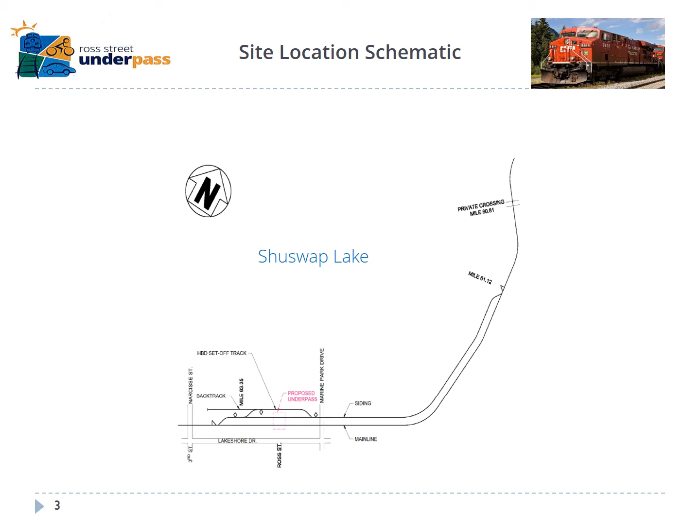You'll hear me use a bit of the railroading jargon tonight, like hotbox detector, for example. We've been forced to kind of learn some of that jargon over the past couple of years, and that's why I have Mr. Lavecchio here to maybe explain what some of that stuff means.

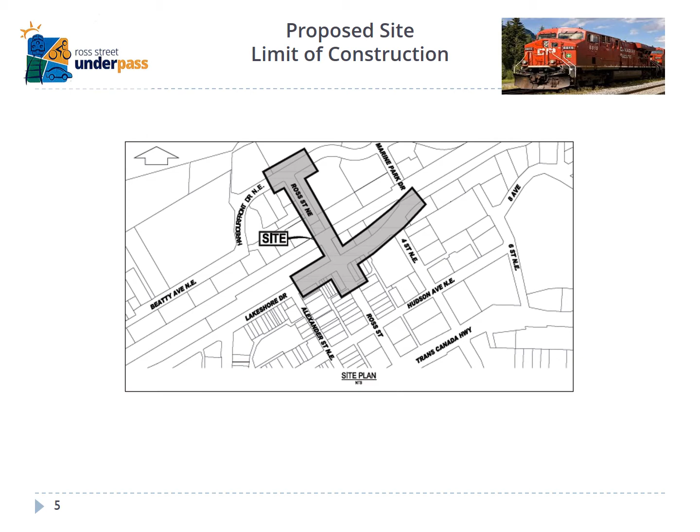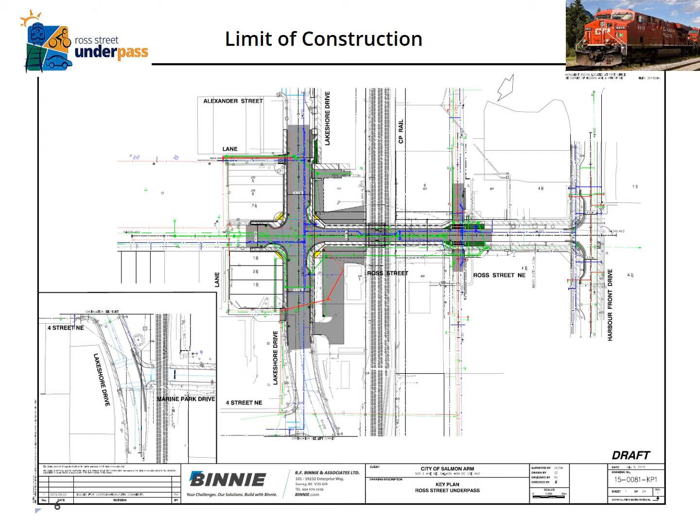Some of the changes that are going to occur with the underpass project - for example, Ross Street, north of the underpass, is going to have no parking on either side.

And also on the right-hand side of the screen, you'll see that there will be no parking on the north side of Harbourfront Drive. And why is that? It's because people that are going to be traveling to the waterfront, pulling boats and trailers, need room to pass. And with the parking that exists today, that simply is not possible.

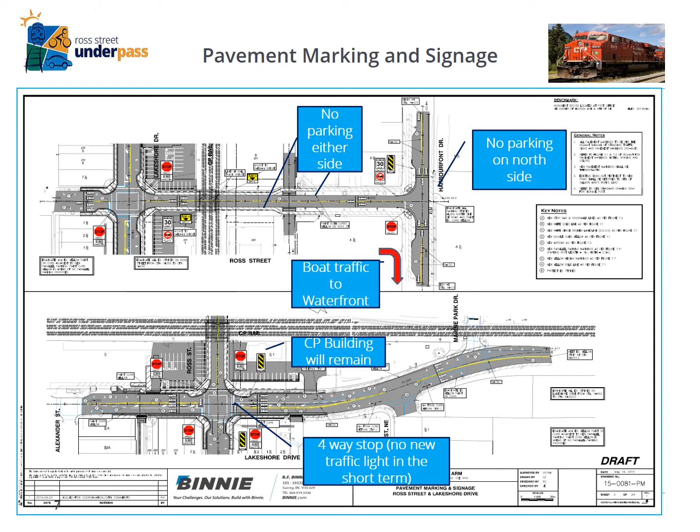What we also show on the bottom half is that the existing CP building is going to remain, and that will remain for the foreseeable future unless we come to some other agreement with CP Rail in the future. To do otherwise with that building would add a couple million dollars to the project, and it's simply not something we're looking at right now because CP...

At the bottom of the screen, you'll see that at the intersection of Lakeshore and Ross Street, it's going to be a four-way stop, and there's not going to be a traffic light at this time, although that may occur in the future. The railroad was constructed a long, long time ago in 1885,

and the concept for the Ross Street Underpass was developed in the early 1980s. So it's not a new idea. There are successive councils that have talked about it and endorsed it in the downtown revitalization plans of the city for many, many years.

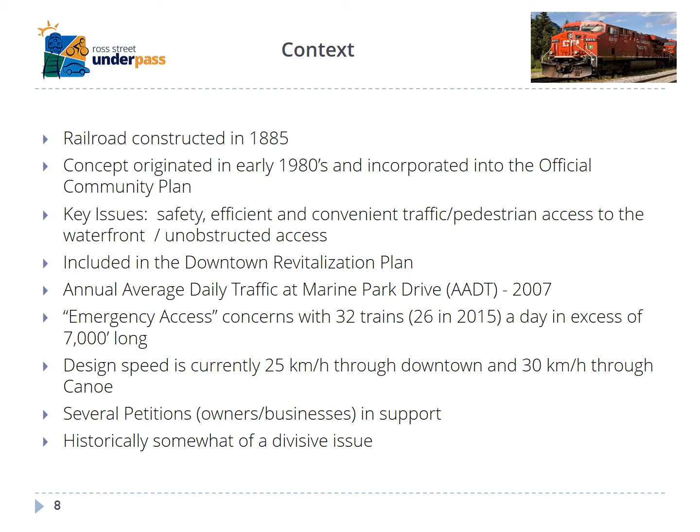Of course, there have been several petitions over the years to City Council, both in favor and opposed to the project. And we've looked at many of them over the years.

For example, 5th Street Southwest, 6th Street Northeast, Shuswap Street, and I'll speak to those just briefly. We've looked at many of them over the years, some perhaps with not as much rigor as we've done with the Ross Street Underpass, because the more that you study these other alternatives, the more you'll see that they're simply not feasible from an engineering, land acquisition, or financing perspective, and that the Ross Street Underpass really is the only and the best option.

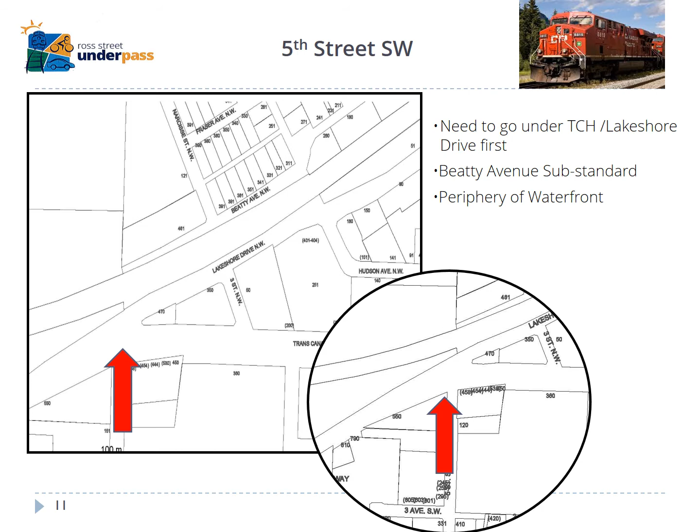For example, this is 5th Street, where we've looked at going over the right-hand side. Some challenges with that location are that you would need to go over or under the Trans-Canada Highway and Lakeshore Drive in order to get to the waterfront. It's really not feasible from an engineering perspective.

And even if you were able to use Beatty Avenue, which is a bit substandard at that location, you would end up trying to enter the waterfront from the western periphery, as opposed to going into the heart of the waterfront at Ross Street. We looked at this, and the time and cost was estimated at 1.7 million, but it's really not feasible from an engineering perspective.

This is an example of what that alternative would entail in terms of developments and major property acquisition that would be needed to go straight down across the tracks from there. And it's simply not feasible at this point in time.

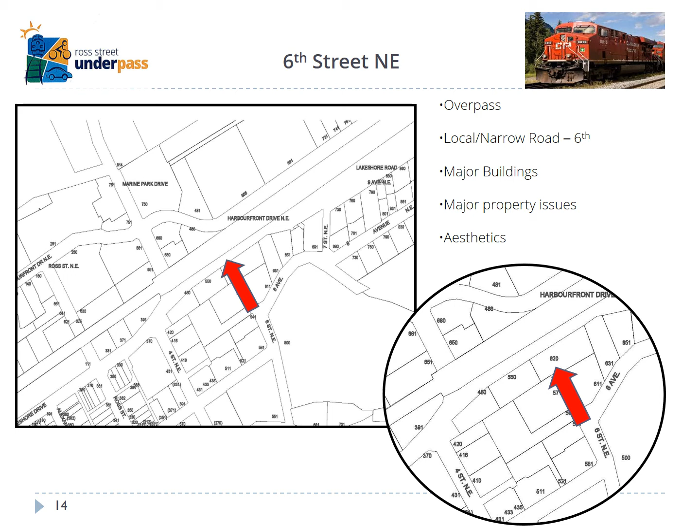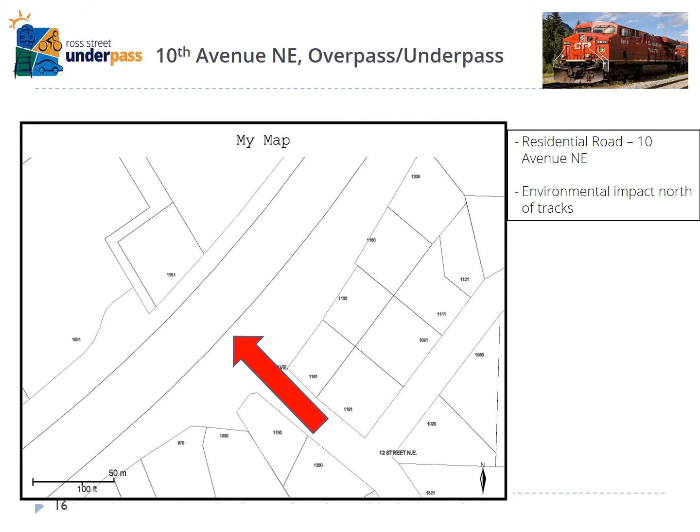There's also the option down from the health unit, and that does have some possibilities, but really 10th Avenue is a residential road at that location, and there would be major environmental impacts on the north side of the tracks. For example, that's where the Raven Trail is, and there are some environmentally sensitive areas.

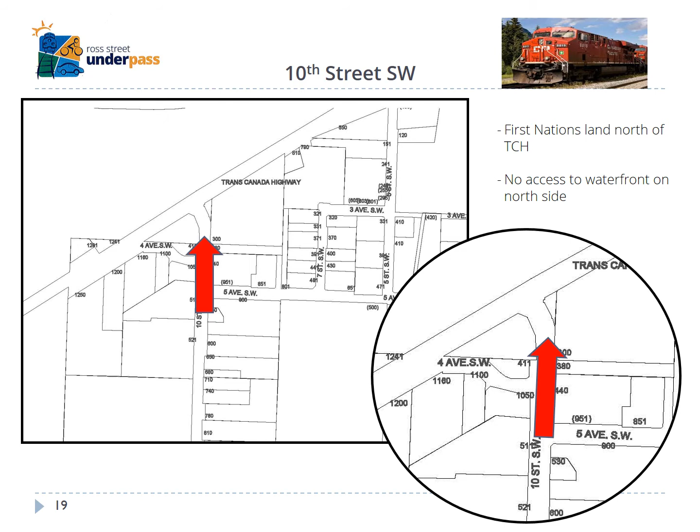We've looked at 10th Street Southwest, but there are many challenges with that location. You can see it goes through Adams Lake Indian Band properties, and there's no access to the waterfront even if you were able to get to the north side of the tracks.

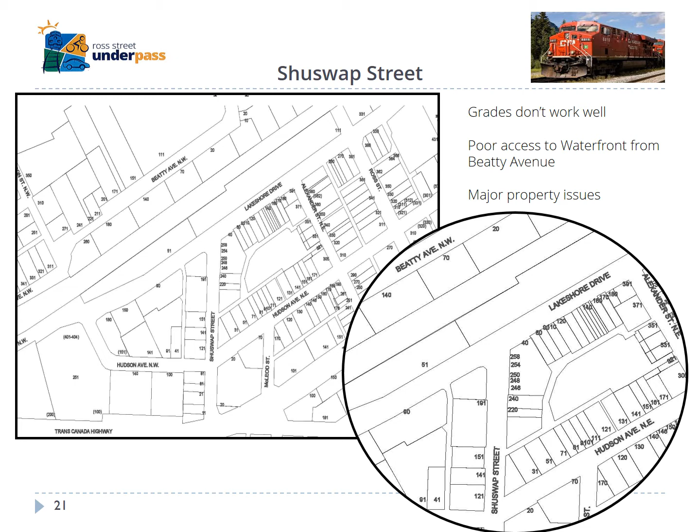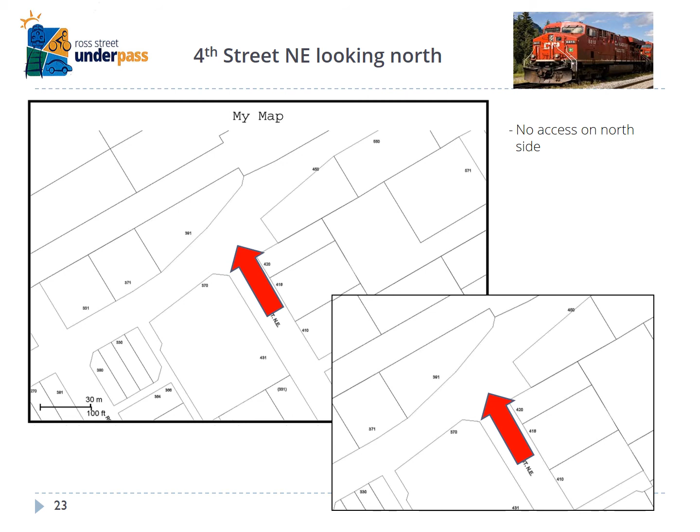We've looked at Shuswap Street, which also has some potential, but the grades don't really work there. There's poor access to the waterfront and issues that would need to be overcome. We've also looked at 4th Street Northeast — again, many challenges, as there's no real access to the waterfront if you were able to get over at that location.

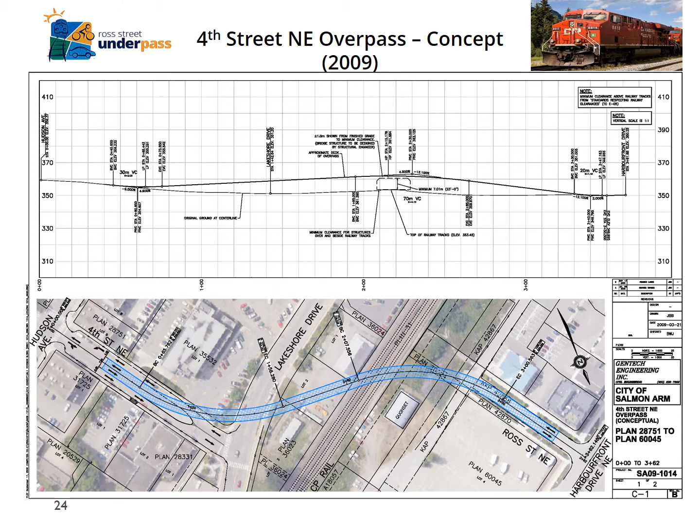We did do some design work on the 4th Street overpass concept many years ago, but really didn't pursue it with much more rigor at that point because it's really simply not feasible.

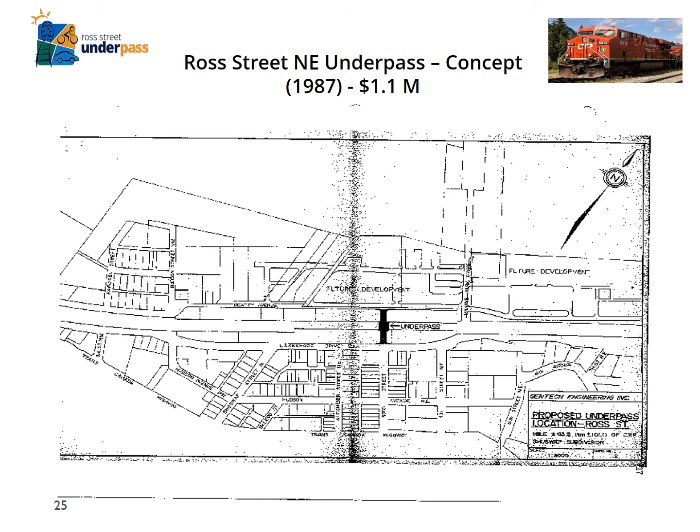So the point of this is that we have looked at many alternatives and without fail come to the conclusion that Ross Street is the only option.

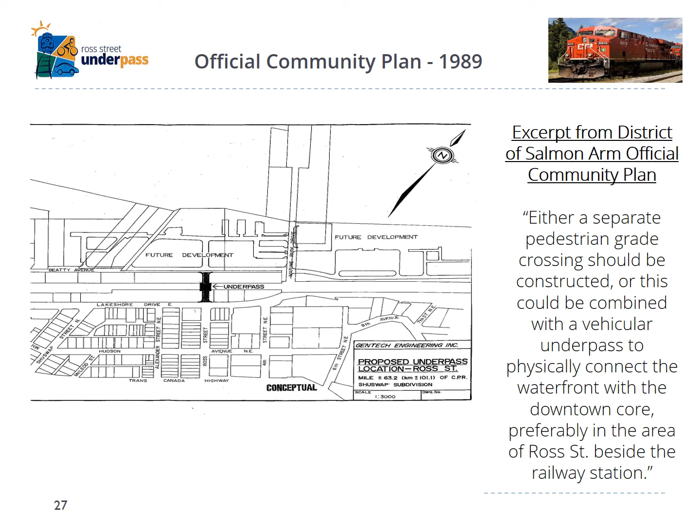This is a design concept that was done in 1987 for the Ross Street Underpass location. This was done by Gentech Engineering, and you can see it was $1.1 million, the estimate back then. So we should have done it then.

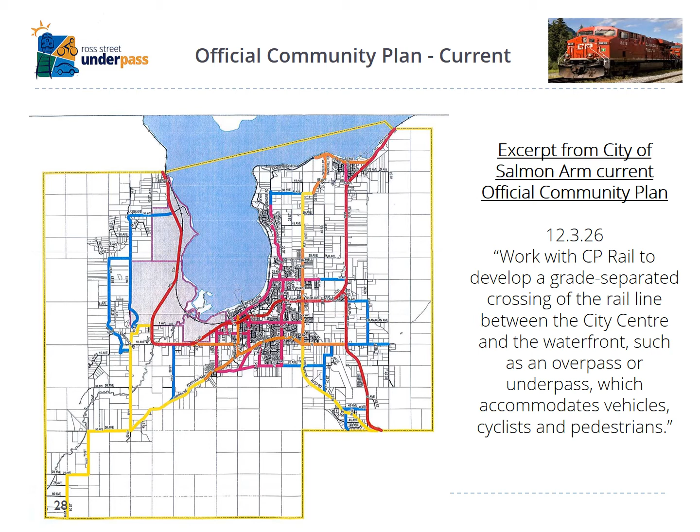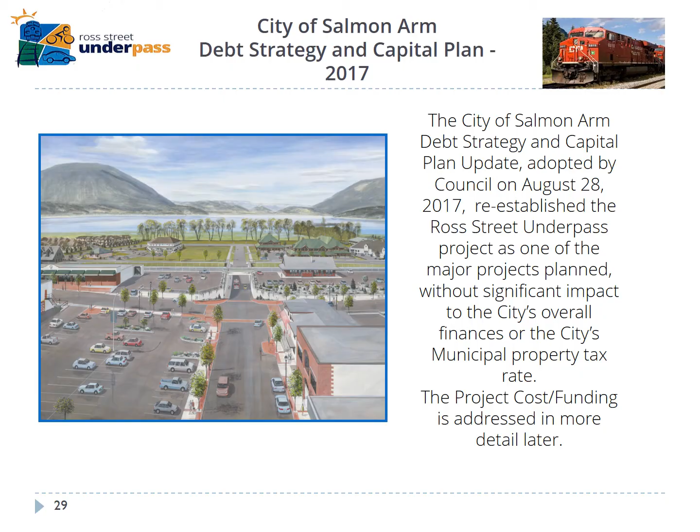Ross Street Underpass has been in our official community plan, as I mentioned earlier, since the 1980s. It's in our present official community plan, if you're one of those people that like to study. It's also in the city's corporate strategic plan, done a couple of years ago and endorsed by council. And as you'll see later, it's included in the city's long-term financial plan and debt strategy. I'll speak a bit more later.

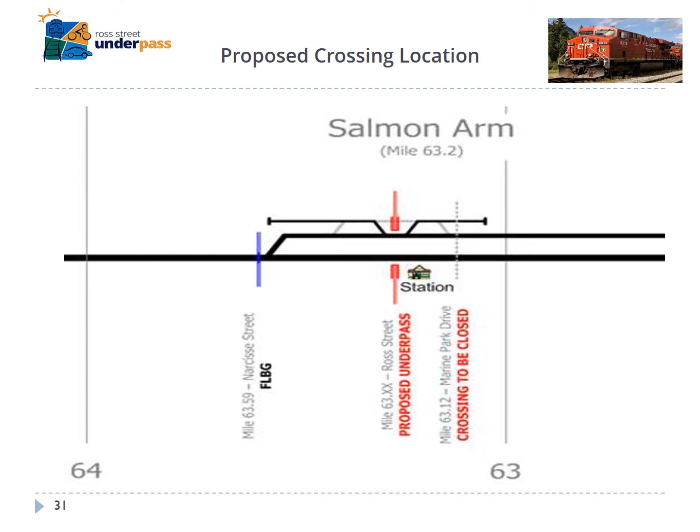This is showing the CP infrastructure that exists there today with the station, and talking about some details if the project goes in for the project in Tappen.

There's going to be what's called a 2-track shoofly diversion, shown by the red lines that may be hard to see on the right-hand side. What it means is the tracks are going to be diverted around the construction area to allow the underpass to be built. Shoofly is another one of those funny CP terms that Mike may speak to later.

Hot box detector - that's a location that exists today where there's a set-off track for trains that are in trouble for mechanical reasons or other issues, so that CP can drive up with their vehicles and do whatever repairs need to be done. So there's a hot box set-off track and detector there today, which is kind of close to Gibbons Motor Toys on the south side, and it would be moved east of Marine Park Drive.

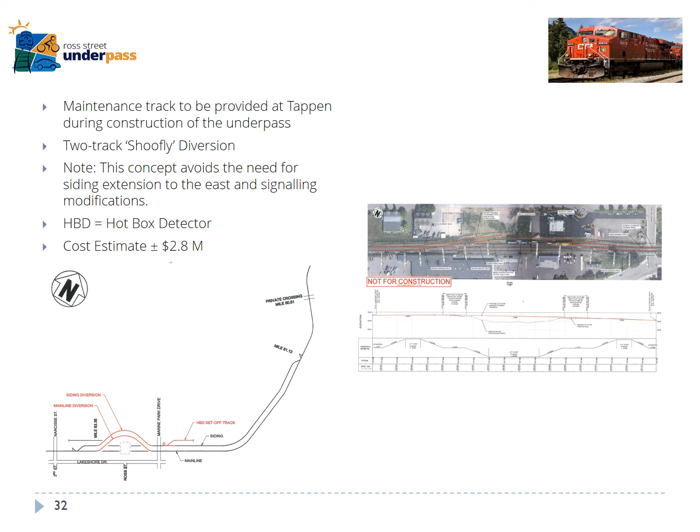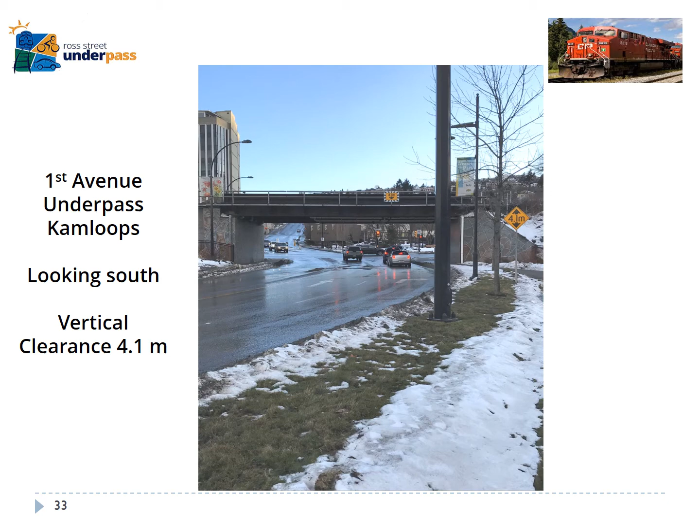The cost estimate for all of these things associated with construction is about $2.8 million. And that's one of the reasons, which we'll talk about a bit later. The vertical clearance is 4.1 meters.

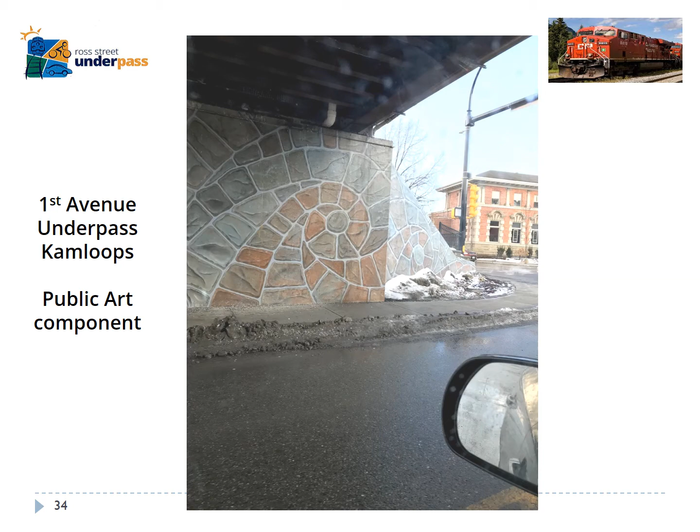This is showing an example of public art that you see in Kamloops with the underpass, and also at the City of Salmon Arm, this location - the city's relatively new underpass on the Trans-Canada Highway on 20th Street. The clearance there is 5.1 meters.

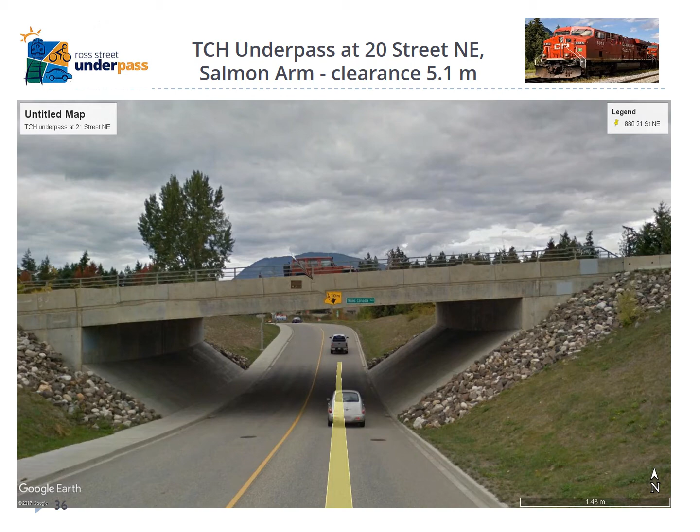Now, if the project does not go ahead, there are a number of risks and implications for the city. For example, you may have read in the newspaper recently that Transport Canada, a federal organization with sweeping powers in this sort of thing, is telling us that there's a potential closure of Marine Park Drive and other crossings in the area.

If there was a grade crossing assessment that the city completed at the request - really demand - of Transport Canada, which was just finished a few months ago, it has a big price tag associated with it, which I'll talk to a bit later, that other municipalities are struggling with right now. Transport Canada has forced many of them to hire flaggers and make traffic pattern changes at great expense.

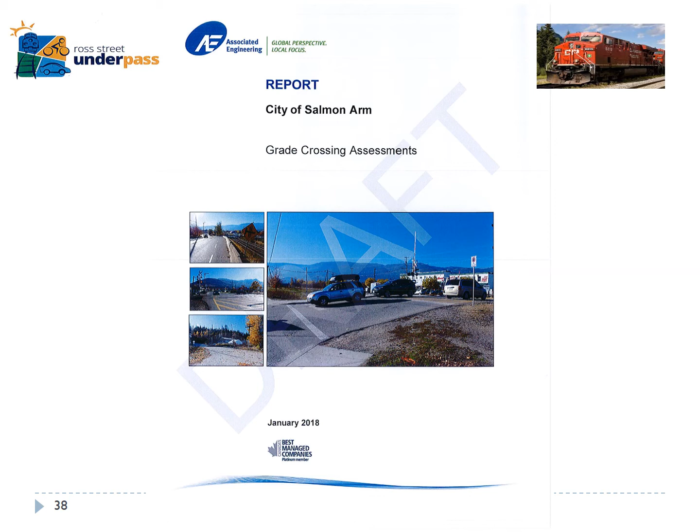This is just a copy of the front page of the grade crossing assessment report, which I referred to earlier, done at the behest of Transport Canada. Some notable excerpts from that, which again is a public report and went to council some time ago.

Essentially, grade crossings have to comply with the regulations by the year 2021, which is going to be a very, very expensive undertaking for the city.

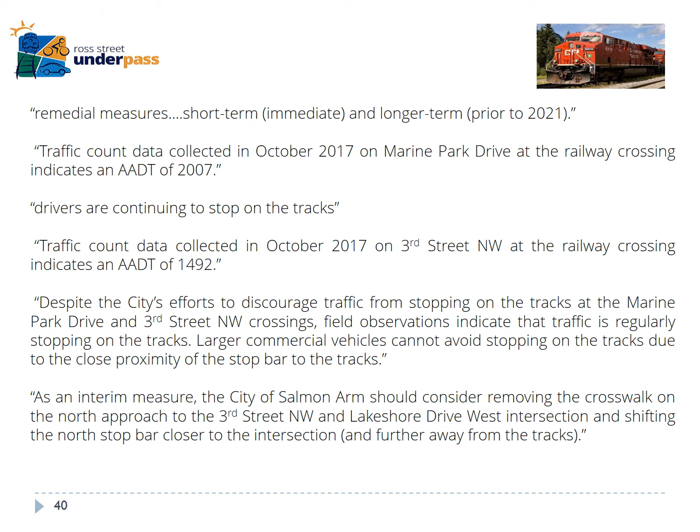We're seeing lots of close calls on the tracks, which I mentioned earlier. The issue really is that sometimes vehicles will park at the stop sign hanging over the tracks, and obviously that's a real danger.

These are the recommendations from that report, and you can see it talks about the requirement to put in signalized intersections at Marine Park and Narcisse by the year 2021.

A few examples of other cities that have had to meet Transport Canada requirements. For example, the city of Kamloops has had to hire flaggers to stand at the tracks day and night, to the tune of tens, if not hundreds of thousands of dollars.

And that's despite the fact that some people don't use the overpass because it's a longer walk, and they cross illegally underneath it instead. Transport Canada has required Kamloops to put flaggers there.

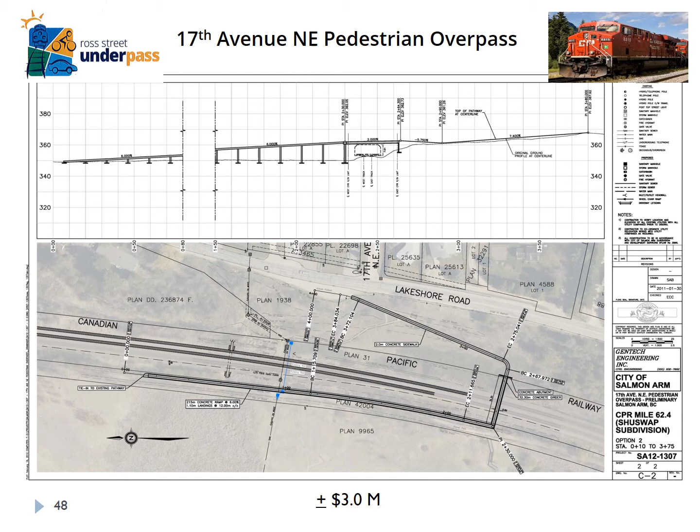This was a media release done in 2007, which talks about the pedestrian overpass project at 17th Avenue in Raven. The city did this press release with Canadian Pacific regarding that project in the future.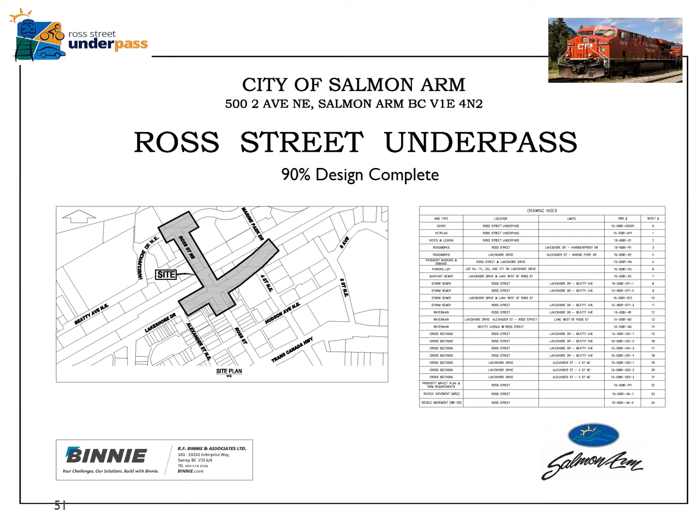The design work for the project is at the 90% stage, and the consulting engineer is Binnie and Associates, located in the Lower Mainland. Here are some important design elements about the project if it were to go ahead.

The low point is 346.8 meters. All vehicles will be able to pass underneath, and of course pedestrians will be able to walk under the underpass, as well as cyclists. There's a potential for a public art component, and there are major stormwater improvements that are going to occur.

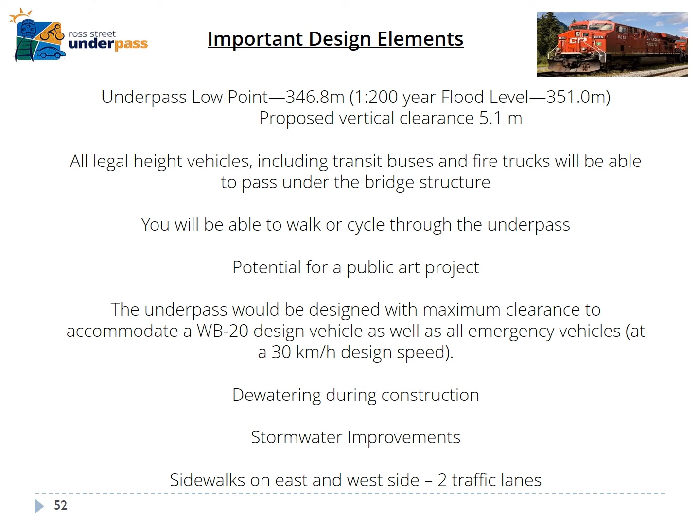Some of the details of the design, which obviously you can't read from where you're sitting, but just to demonstrate how far the design has proceeded.

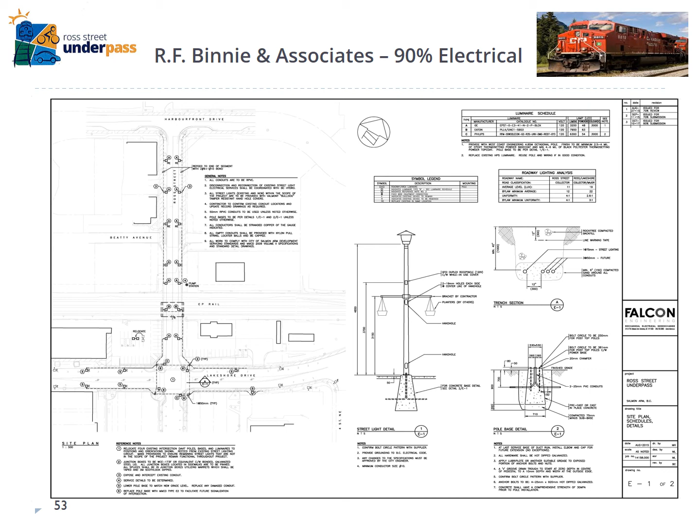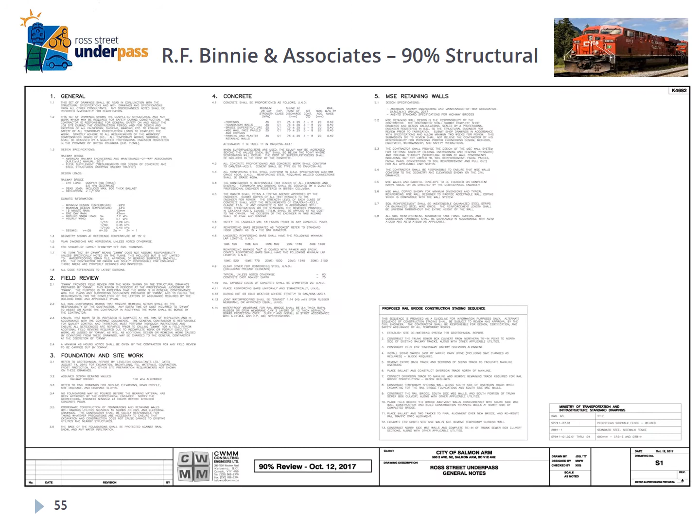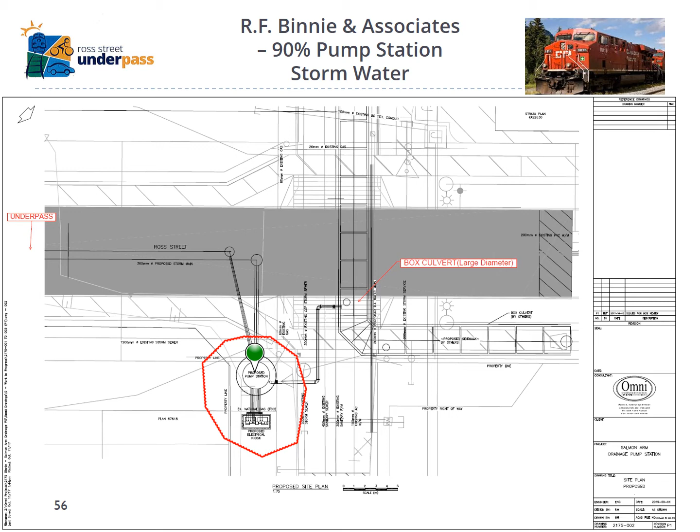Landscaping, structural, stormwater—the green dot is a stormwater pump station, which will be installed with the project and provide major improvements to the storm infrastructure that's there, to the tune of about $630,000 for that part of the project alone.

The storm sewer system is going to be relocated west of where it is today, because where it is today is exactly where the underpass will go.

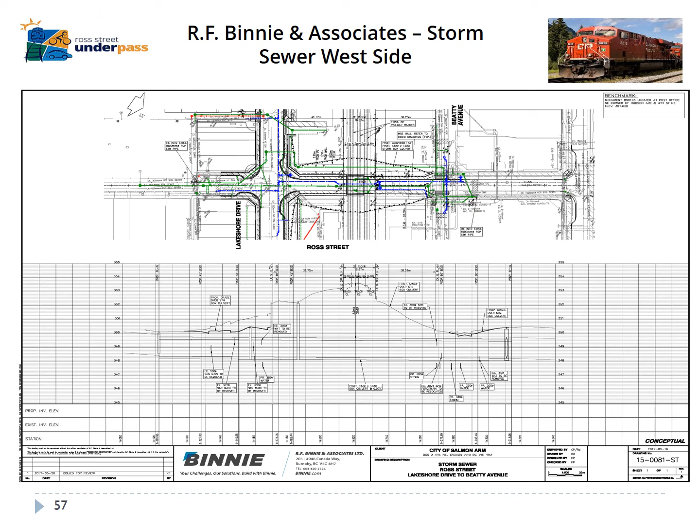And the city has been actively securing the rights of way that are needed for that to occur.

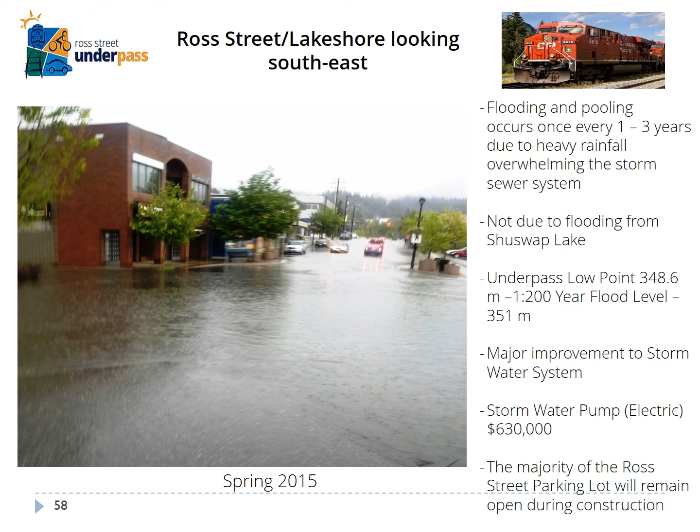Important to note, it's not from Shuswap Lake. It's from the stormwater system being overwhelmed. If we get flooding in this area because of Shuswap Lake, then we have much bigger problems to deal with. If we get water from whatever source, the city would simply put barricades up and close it down for a couple of hours while the storm system does its thing. There are lots of underpasses on the prairies which are flooded all the time.

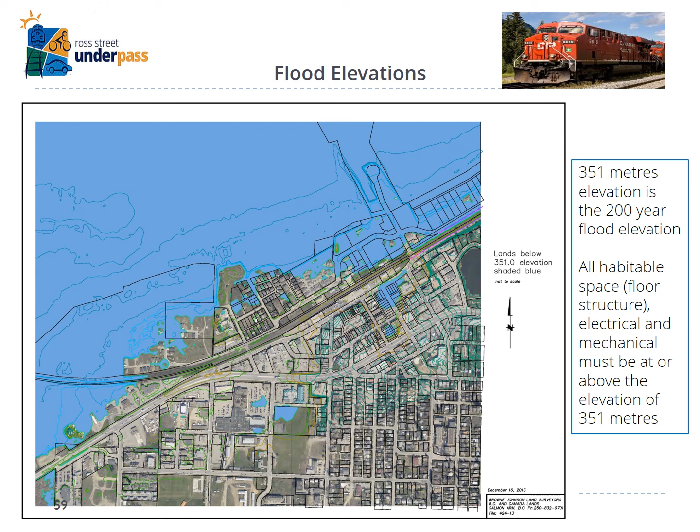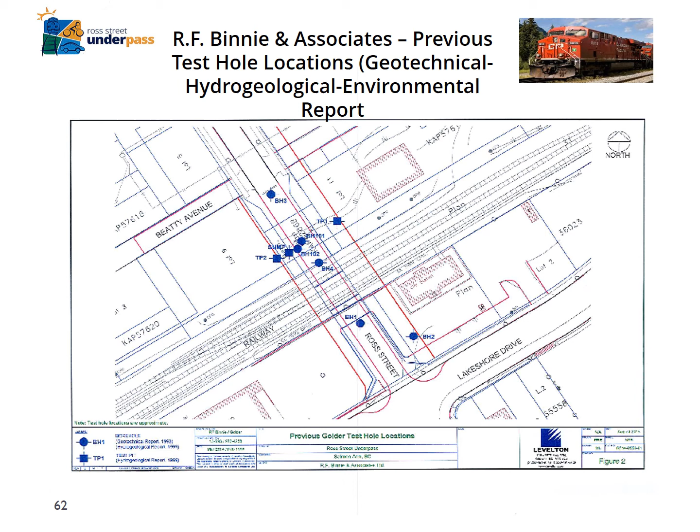The cost of the project, you can see, is $12.368 million. That includes a $630,000 stormwater pump system that we talked about earlier.

And as I said, the price has gone up over the years and is going to continue to escalate if we don't do the project.

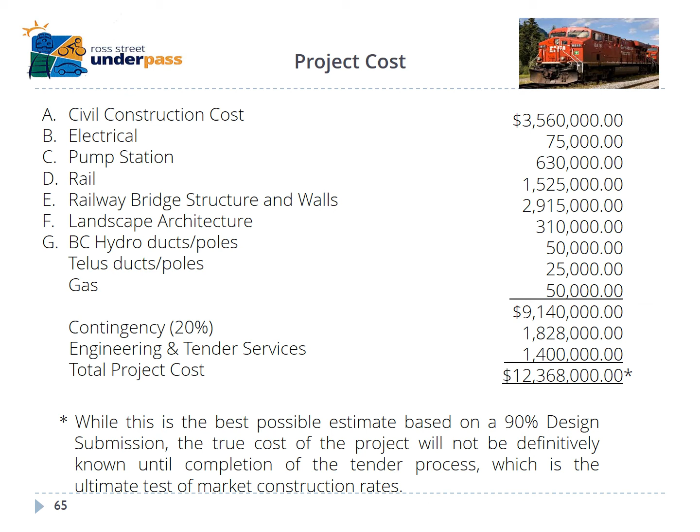Project funding, as I said, the city has obtained funding for more than 50% from other sources, including the gas tax, Transport Canada, a generous contribution from CP Rail, and long-term debt projected at $5.1 million, which I'll talk about a bit later.

The debt servicing cost of that, in other words what the city has to pay, is $316,000 a year. And there will be no tax increase to pay that money back. How can I say that so confidently? It's because we have debt on the Shaw Center paid out in July of 2019, and the cost of doing that today is about $450,000 a year. So what we're going to do is simply use those funds to pay off the Ross Street Underpass instead.

So it's, I like to say, baked into the city's financial cake already. These costs are subject to change, and I'll talk about that a bit later.